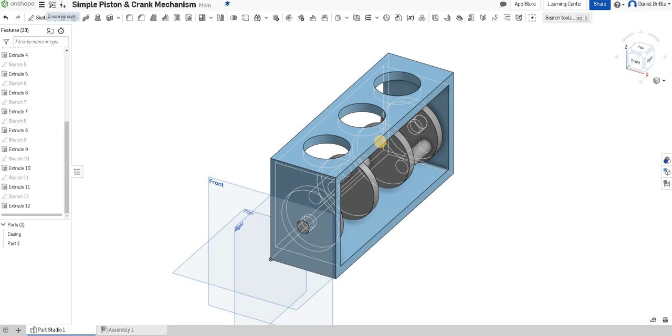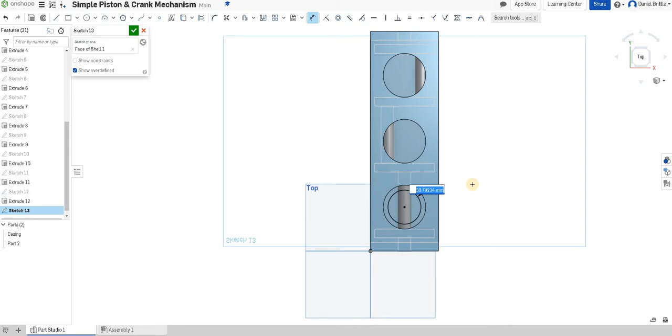We're now going to create one of the piston heads. Rotate this up and select the underside of the casing. Once selected, we'll start the sketch and draw a circle that matches the first ring here, where the crank hits its highest point. Draw the circle out, making sure to lock to the centre, then dimension it at 50 millimeters. You can see that matches up quite nicely.

Finish your sketch, extrude that sketch as well, and make it 60 millimeters tall. The arrow is going the wrong way, so we want it to go upwards, and we want it to be a new part. Make sure you select new, don't get caught out like I did earlier.

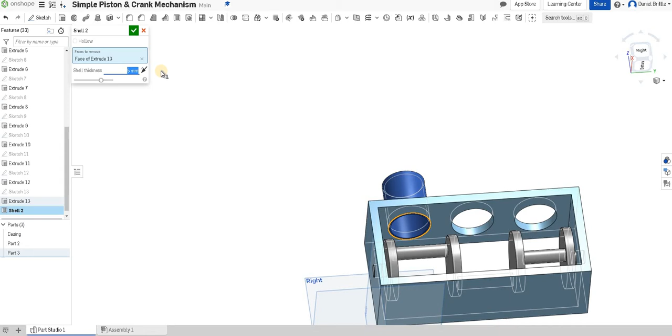Then we're going to have the shell feature at the bottom here, and we're going to have 5 millimeters, press enter. So that shell thickness is a whole 5 millimeters, which should work quite nicely. Finish that with a tick.

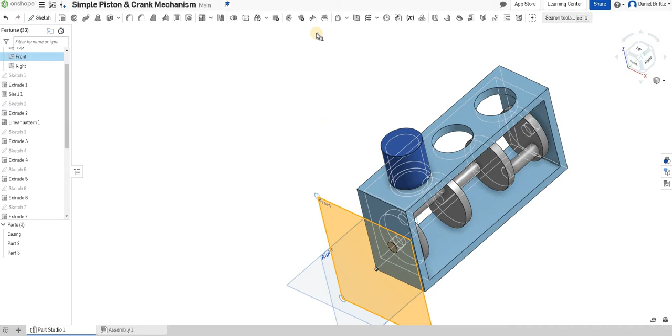Now we need a bar through the center of this to connect the crank and the piston to one another. If we look at it from the front, we haven't got a flat surface to create that bar from, so we need to create a work plane. Select the front work plane, use the plane option at the top, look at it from the right hand side.

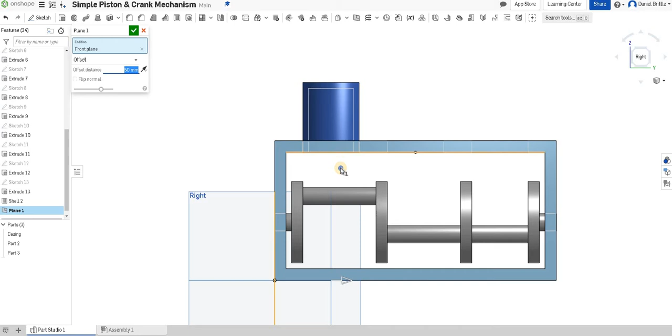So we can see how far it's going, run it in the center of the piston ideally. The arrow is going the wrong way at the moment, so we'll move that across roughly into the right position. It'll give us an indication of the numbers we should be using, so it should be around 50, which looks like it's going to be in the middle. We can click tick on that.

We're now going to draw on that plane as a sketch, looking at it from the front. There's a circle in the center of this piston, so just put it in there. Let's dimension that up now, so the distance from the top here we're just going to make 15 millimeters.

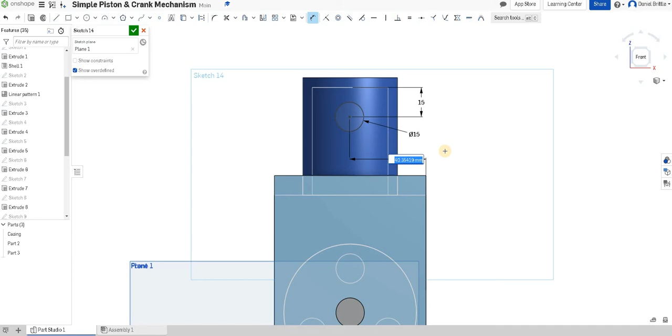The circle itself should be 15 diameter, and the distance from the edge of the piston, if we're allowed to select that - it doesn't look like it wants us to - so select that distance from the edge of the whole part as 40 millimeters, so it's nice and central.

We can finish up with a tick, and as we rotate round you'll see that circle's hovering in the middle at the moment. So when we extrude it, it's going to have to go symmetric to reach both faces, and the face that we're doing is sketch 14.

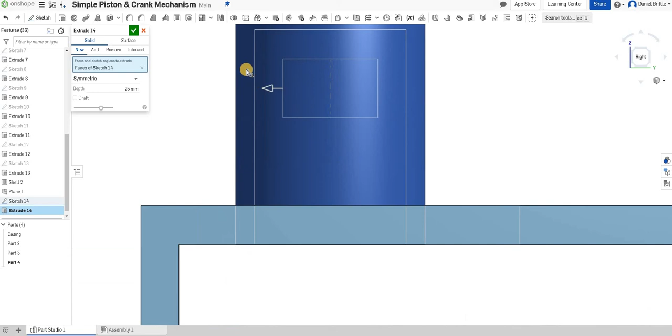So I'm going to look at it from the right hand side. I want that to be sitting nicely just in this region, just inside, as close as we can get. So let's make that 40 millimeters, and you can see it should be connecting.

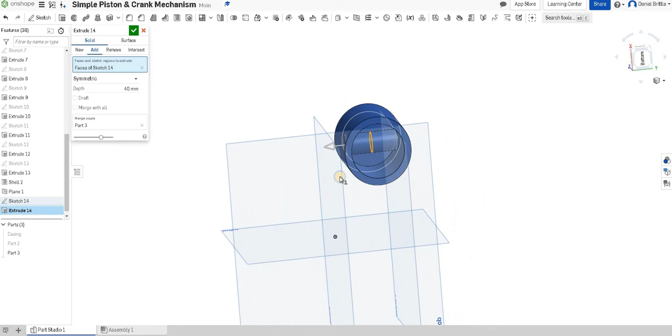If we look at that from underneath now, I'm going to hide some of these other parts - the casing and the crank - and we can have a good nosy around on the inside there, so you can see that is fully connected just as we want it to. We can finish that, unhide the other two parts, and then we've got our first piston head.

We are only going to create the one, because when we assemble everything we can create the next ones that we need. So we can just repeat the same thing, and it saves you some time at this stage.

The only thing I'm going to do is add a little bit of detail to my piston head. We're going to add a chamfer to this edge, not the inside edge - sorry, I've selected the wrong one there. So close it from your list, select the outside edge, and just 5 millimeters is absolutely fine.

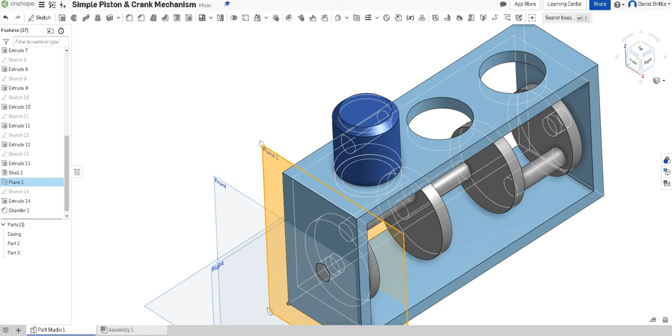The other thing I'm going to do is on plane 1, so look at it from the front again, we're going to create a little detail around the edge. I'm going to sketch on plane 1, and draw a couple of small rectangles, maybe 3 rectangles here, and dimension those together.

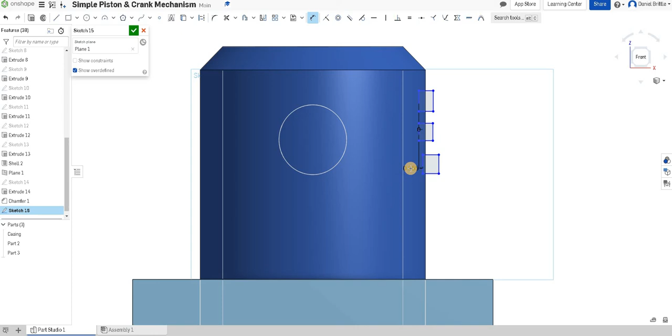So the distance between those should be 0, and the distance between these should be 0 too, so they all line up. As long as they're poking out the side, I don't mind the width. So the distance between them, I'm going to make that 3.

The distance between these I'm going to make 3 too, and then the height of each one we'll make 3 just for consistency. The last one here, 3 millimeters too. And we'll go distance from this top edge can be 7, and then we can see that they're all overlapping, so I'm not worried about the width.

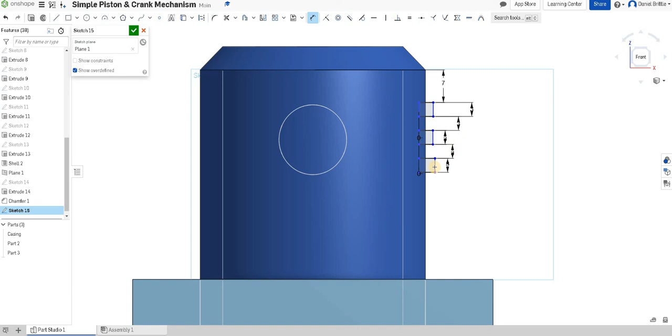I'm going to click tick. Okay, we're fairly happy with those now.

We're going to create a revolve with these - you'll notice in a second there's one more thing I need to go and draw back in - but we're going to try and revolve them around this shape, and hopefully we can work around it. So click the revolve tool.

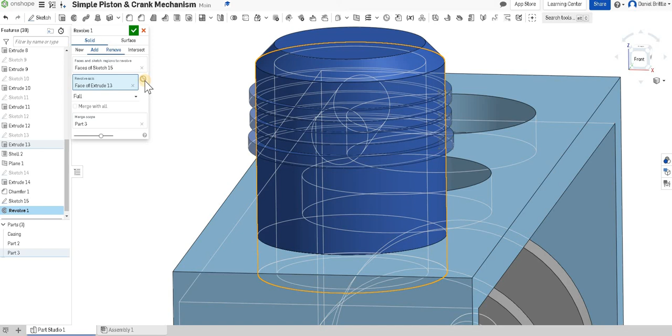I'm going to use sketch 15, so it's doing all 3, and then the revolve axis I'm going to try and use this whole cylinder, so you can see it has worked, which is great. We just want to select the remove tool and then select tick, and that's just added a little bit of detail to the piston.

To add a little bit of interest to our design, I'm going to turn off the hidden edges and we can see a little bit more what it looks like. The only things to really finish now are adding the handle and the connection between the two before we go and have a little bit of fun with the assembly features.